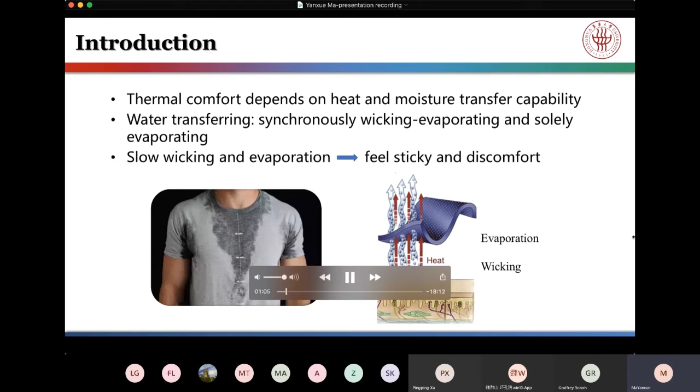One is synchronous wicking evaporating, and another one is evaporating alone. In case of excessive perspiration, clothes are saturated with air and moisture. The relatively slow action of wicking and evaporating could make people feel discomfort. So evaluation of the water transport ability of textiles is very important in fabric design and some functional clothing.

So the main purpose of this study is to provide an in-depth understanding of water transferring in woven fabrics. As we know, fabric porosity can influence moisture transfer, and it was found that the float and interlacing point, which are the 2 elements in a weave, can increase the whole water transfer to a certain level.

However, studies on water transfer behavior of woven structures, considering the percentage influence of different weaving elements, are very rare. So in this study, we designed 4 types of basic units in a 1-layer woven fabric, depending on the 2 directions of yarns, interlacing or non-interlacing. We aimed to review the water transfer process of woven fabric and to identify its main influencing structural parameters.

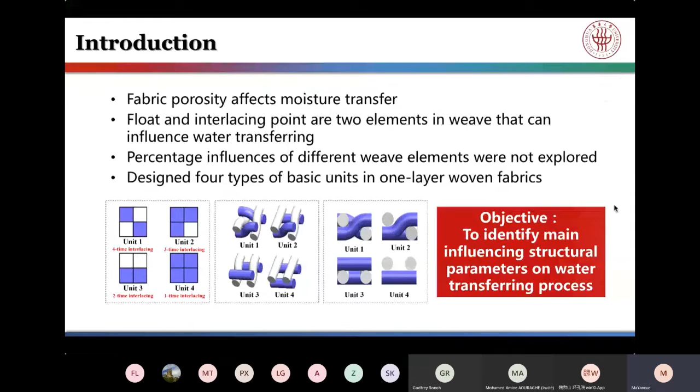Next, I'd like to show the experiment design in the study. All weave types are composed of interlacing points and non-interlacing points, as shown here. In the study, we adjusted the proportions of the 4 units in a weave and created different structures with varied floats.

Since the weave pattern influences wicking and evaporating behavior of fabrics, we varied the 4 weave units and their arrangement. Fabrics were designed and produced with different proportions of weave units. You can see these 8 fabrics have different weave units and different arrangements of these units.

Here are the results of the basic physical and structural properties of these samples. In addition to physical and structural properties, we focused on wicking evaporating behavior, so we needed a better way to evaluate it and collect the data for these measurements.

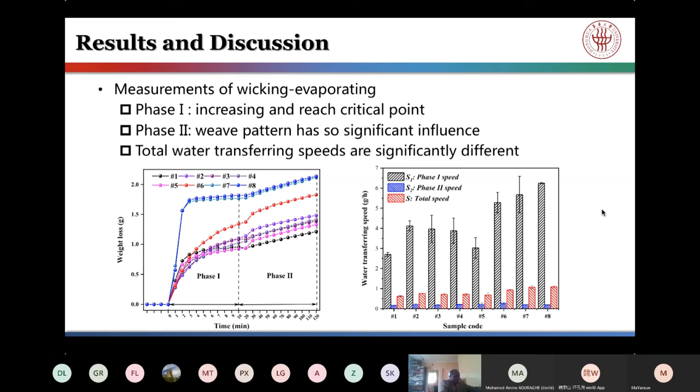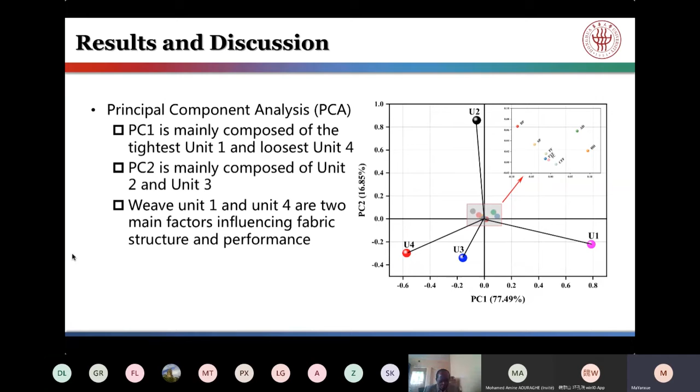To make a conclusion: in the study, a wicking evaporating test based on vertical wicking was used to investigate the water transfer behavior of cotton woven fabrics with different weaves. There are two phases during the wicking evaporating processes. In phase 1, it's unsteady wicking and evaporating, and in phase 2, it's steady wicking evaporating due to equilibrium between the capillary and gravity forces.

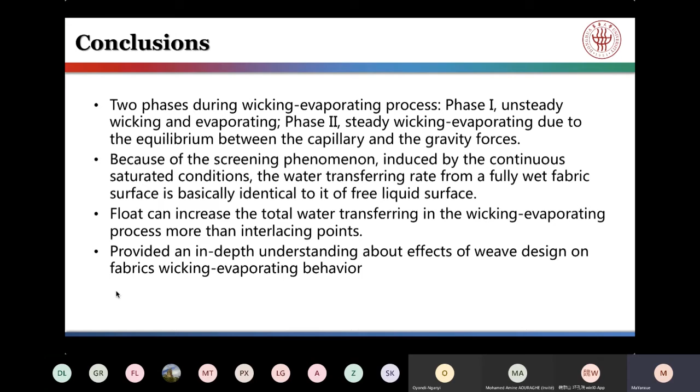I've finished my presentation. Does anyone have a question for me? Thanks very much for your presentation. Then I think I can ask the listeners if they have any questions for your presentation. Any questions?

Maybe if there are no questions, then maybe it means that your presentation was very clear. But maybe if there are questions we can raise at some point later on in time. Thank you very much.

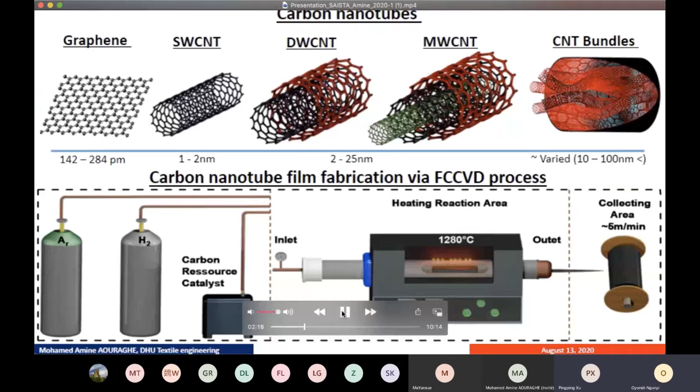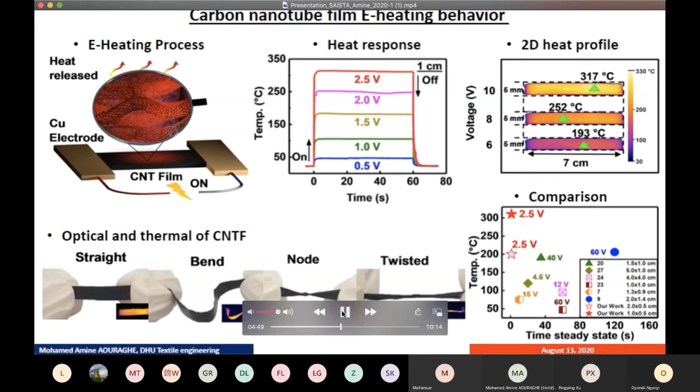As an application of the thermal conversion of CNT film, we have made a composite based on CNT film and PDMS to make an electrothermal actuator.

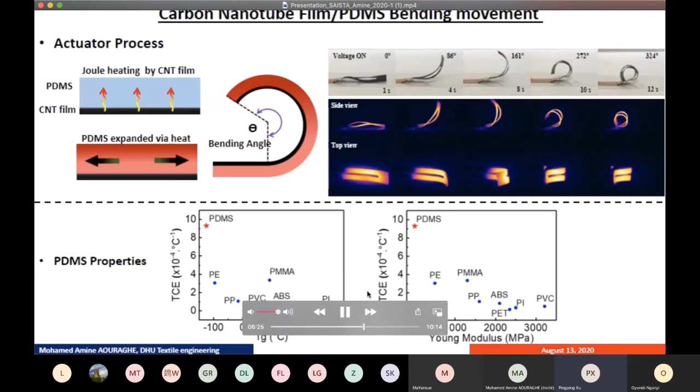Due to the high thermal conversion of CNT film, the heat is transferred directly to the PDMS, which expands under heat and leads to mechanical deformation and bending of the composites, as shown from the optical and thermal images. The mechanical movement is mainly due to the coefficient of thermal expansion mismatch between carbon nanotube film and PDMS. Among common polymers, the used PDMS has a great coefficient of thermal expansion and is a soft material, which leads to large deformation.

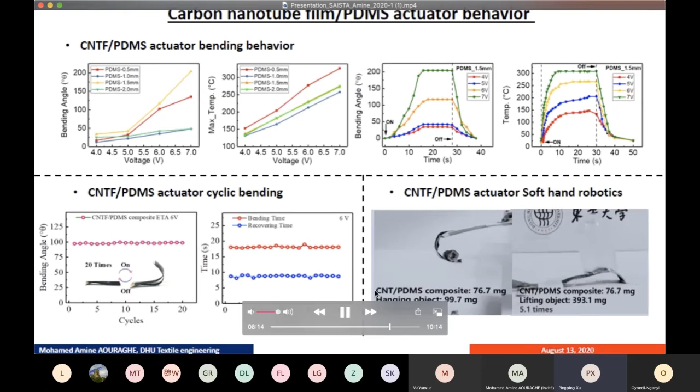In addition, the fabricated PDMS actuators showed a stable response over time, with stable bending angles of around 100 degrees at 6 volts, even after 20 cycles of on-off. The bending time and recovery time also remained stable after 20 cycles.

Finally, the actuator shows great strength and can hold around 1.3 times its weight, and lift around 5 times its weight, as shown from these optical images.

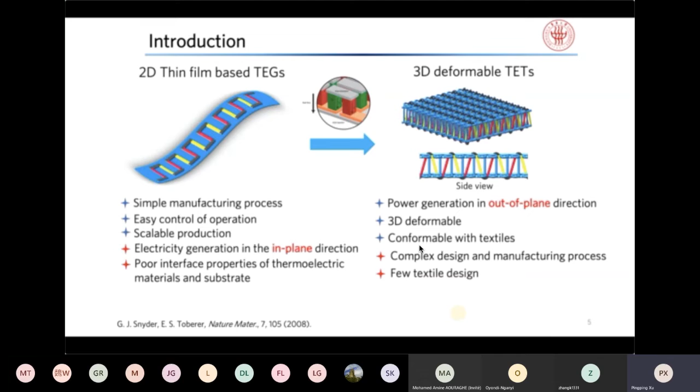So the first step: we fabricate the segmented thermoelectric yarn using highly conductive carbon nanotube yarn. We wrap them into a PET plastic plate and then coat them with silver paste as the interface with the p-type and n-type materials, using the center part as the electrodes.

You have alternating p-type, n-type, p-type, n-type segments. So then we can use the thermoelectric segmented yarn to fabricate the thermoelectric generator.

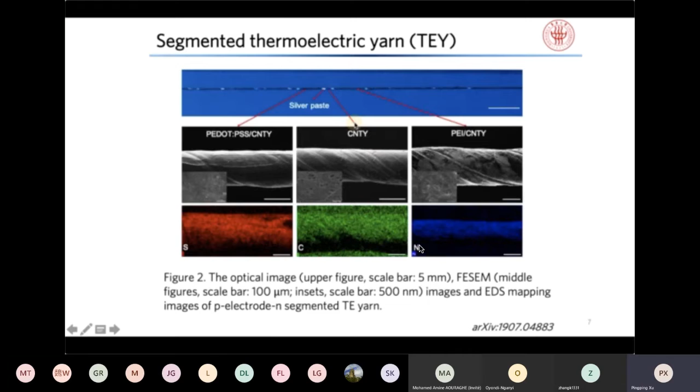The middle part is the pure carbon nanotube yarn, acting as electrodes connecting the p-type and n-type materials. We also measure the thermoelectric properties of the three different segments: the conducting polymer, the pure carbon nanotube yarn, and the p-type and n-type ones.

We then investigate the effect of textile structure on power generation, selecting three types of fabrics: knitted fabric, spacer fabric, and woven fabric. We use finite element analysis to simulate the power generation.

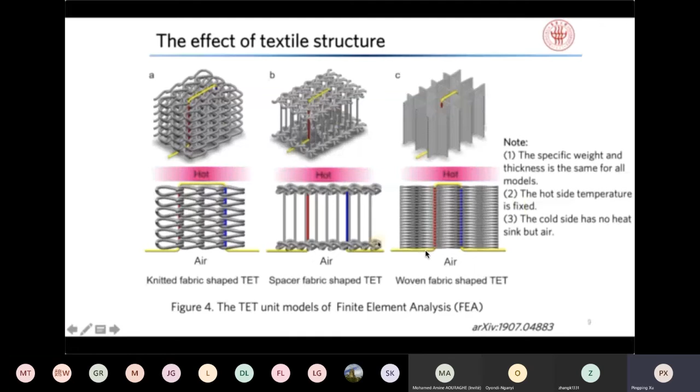We believe this is caused by thermal transport in the fabrics, and the total temperature difference in the thickness direction is dominated by the total thermal resistance. Different fabric configurations result in different thermal resistance of the textile, changing the temperature distribution and the corresponding potential distribution within the thermoelectric yarn.

Typically, woven fabric has a very regular yarn arrangement in the thickness direction, so we believe there are few closed channels that can lock static air to suppress thermal convection in the woven fabric.

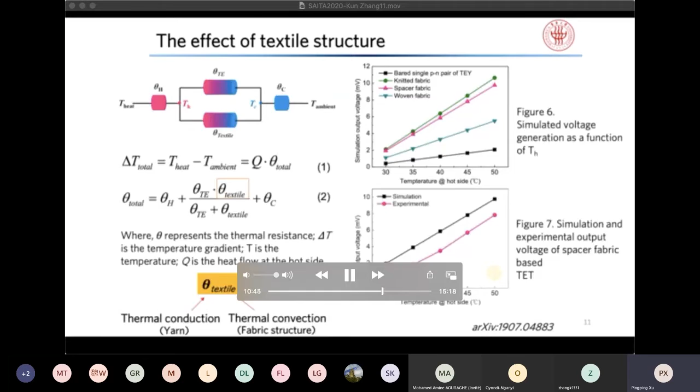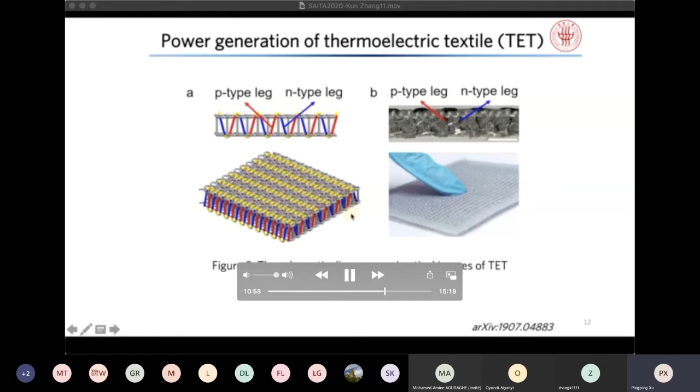As mentioned before, the actual structure of the thermoelectric generator, the textile-based ones, shares a similar configuration to conventional bulk inorganic thermoelectric generators. The thermoelectric textile shows very flexible properties under bending, twisting, and compression, and the performance is stable even after 1,000 cycles of bending, twisting, and compressing.

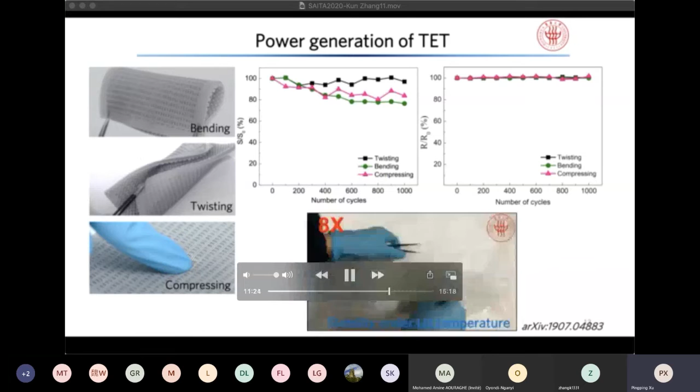Moreover, it shows excellent flexibility and functional stability at liquid nitrogen temperature, where lithium-ion batteries would be disabled due to frozen ion transport. We then measured the power generation at different temperature differences and external resistances.

Our thermoelectric textile outperforms the majority of textile-based thermoelectric generators, and it is the best one ever reported among organically based thermoelectric textiles.

We further demonstrate the capability of powering electronics for practical applications by firstly charging a supercapacitor. Then we use the supercapacitor to power electronics, and the diagram shows how we charge and discharge the supercapacitor.

The red part shows the charging time and the green shows the discharging time. We can see the charging time is much shorter than the discharging time in the consumer product, which means we can use the thermoelectric textile to continuously power electronics.

This summarizes the power requirement for different electronics, and we can see this is much lower than the power generated from the thermoelectric textile.

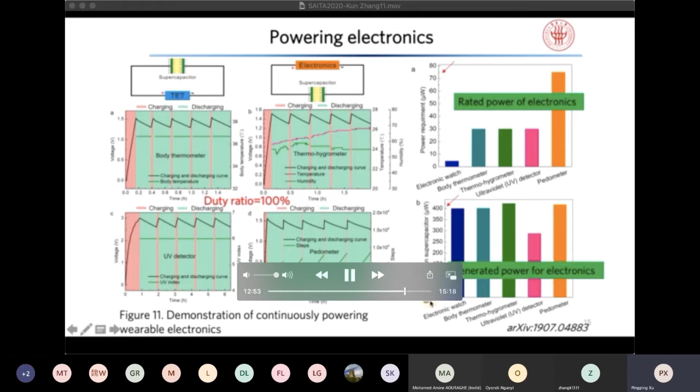This video shows how we apply a temperature difference using liquid nitrogen, and then how we generate power to power something. We can also use the thermoelectric textile to directly power electronics like a thermometer, hygrometer, UV detector, and pedometer.

Finally, we demonstrate how to scalably fabricate the thermoelectric textile using an industrial textile process. For example, we quickly braid the thermoelectric yarn with a sheath of polyester to improve anti-friction properties, and then we use a computerized flat knitting machine to produce the thermoelectric textile.

The textile thermoelectric is very flexible. It should be mentioned that we can precisely control the N-type and P-type yarn movements in the knitting machine.

The N-type yarn arrangement may not always range perfectly in the textile, but in the lab project, we achieved that uniformly.

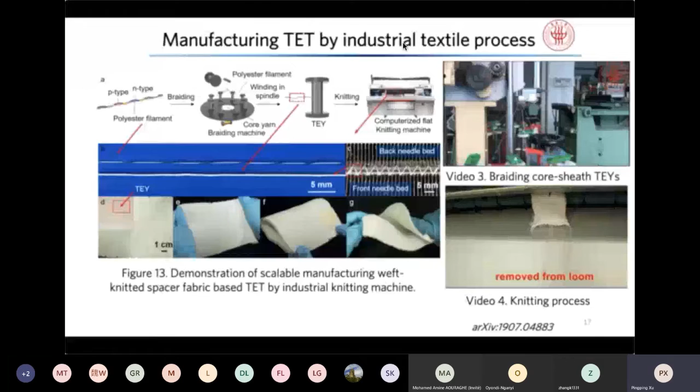Finally, I would like to conclude my presentation. We demonstrate thermoelectric textile and investigate the effect of textile structure on power generation. We achieve high power generation performance with a power density around 50 milliwatts per square meter at a temperature difference around 47 kelvins, and for the first time we successfully and continuously power various electronics using thermoelectric textile.

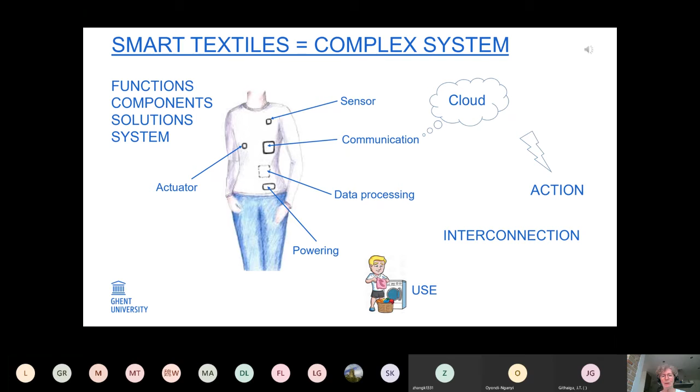Now our research mainly contains 4 steps. First, conceptual design. So we look at the different concepts that have been described in literature, in textiles, but also in other areas. Based on that, we pick solutions, concepts, which are compatible in terms of the materials used and also the processes needed for manufacturing them.

We also look at modeling and simulation because this allows us to optimize the design and the materials choice before making anything. Then, of course, we have the fabrication, which should be as much as possible in line with existing textile processes in order to avoid large investments in new facilities. And then, of course, also the testing.

Now, some products are already on the market. Here are just some examples. Mainstream markets, such as the Adidas miCoach shirt, which is used for heart rate monitoring for sports people.

Then the mid-segment is fashion. This is an example of CuteCircuit. It's a t-shirt equipped with LEDs and movement sensors, accelerometers, which monitor when a person is moving, and then the movements are reflected in the lighting of the LEDs.

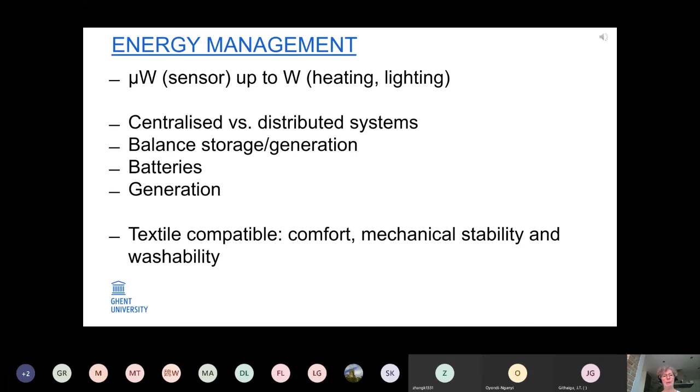The first work we did on energy storage has been in collaboration with Moi University. It's Dr. Sheila Odhiambo who did this work, and it was continued by Dr. Ida Nuramdhani from Indonesia. It actually consists of two conducting wires which act as the electrodes, a positive and a negative one.

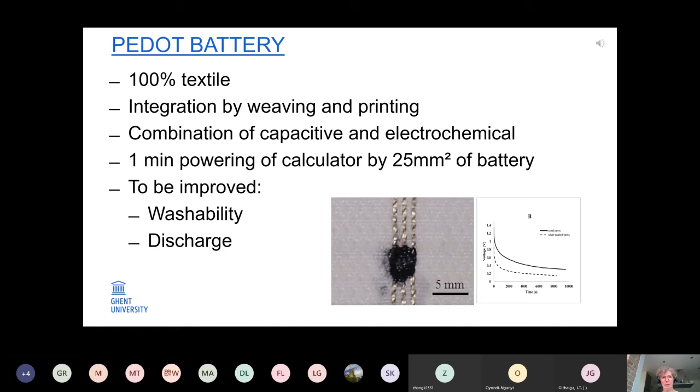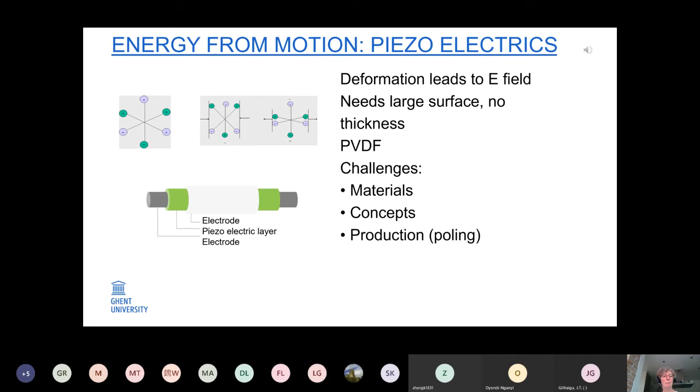Now, when you deform a material, the piezoelectric effect is a surface effect. So the energy you need for deforming the inside, the bulk of the material, is actually wasted. Part of it will be recycled, but as you know, deformation for most materials is not fully elastic. It has some hysteresis, and this is a loss of energy. So for a thick material, this energy loss will be higher, whereas the piezoelectric effect is purely surface - the bulk material doesn't add to any additional power.

That's why we need a minimum thickness, but the minimum should not be too low, because then we may have percolation of current between the two electrodes, and then you get holes and the system is broken, it doesn't work anymore. Particularly during the poling, where we need a high electrical field, this is an issue.

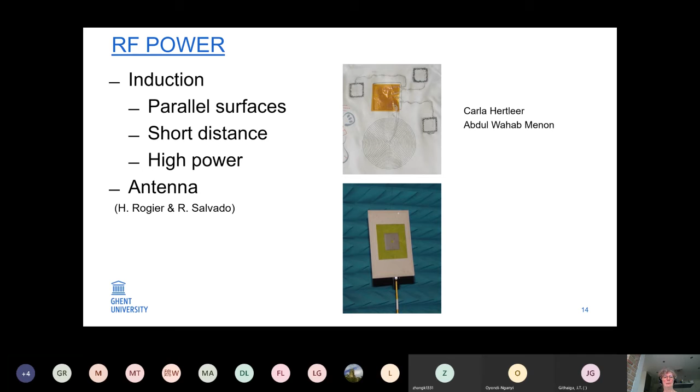Once the baby starts moving, this is not working anymore, because the surfaces will not be parallel, as the baby will turn around, and then we have to use another way - a regular antenna. This is the green patch you can see here, but actually the green patch is the substrate. The antenna is the gray part, which is laminated in this picture.

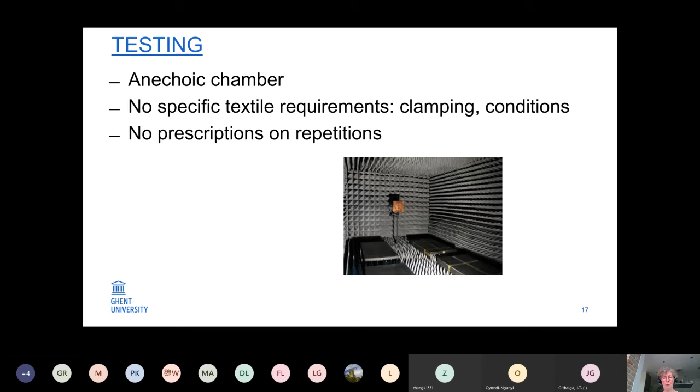It has been explained already in the previous paper, so I won't repeat this. The start of the work has been the thermocouple with copper and nickel materials. The PhD student working on it is Hardianto, and he will defend his PhD next week. So should anybody be interested in joining the presentation, please send me a message and I can forward you the link. It will be online.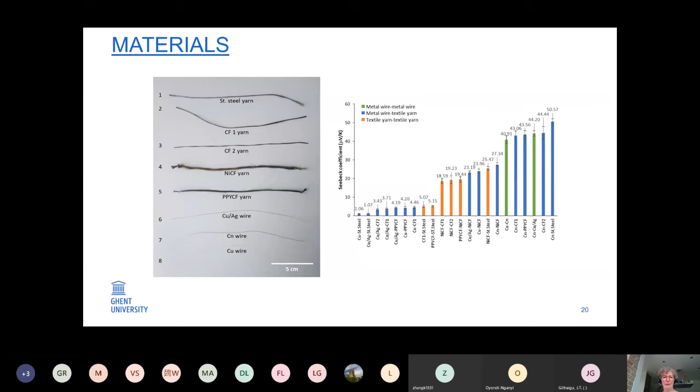For the textile structure, we have used carbon multifilament as a conductive core and nickel as the second material. The Seebeck coefficients of the materials are 3, and should be -15. So we can expect a theoretical output voltage of around 18. The carbon fiber has a moderate conductivity, which is needed to make sure the current is passing through the nickel coating in the dedicated area. This allows creating such a thermoelectric effect using a textile yarn inserted by a regular weaving process.

The coating can be achieved either by local etching of a nickel coating on a nickel carbon fiber material, which can be bought commercially via the internet, or by local electroplating of the nickel onto the carbon fiber multifilament.

How did the models help us here? Well first, on a material level, it gives us an idea on the maximum achievable output, the material impact, considering both the conductivity of the materials and their Seebeck coefficients, and the dimensions of the whole system. For the modeling, we needed to do some simplification, but we also managed to show that simplifying the multi-filament into a monofilament with the same cross-sectional area of the carbon fiber and the nickel coating is allowed. It doesn't have an impact as long as a good contact can be guaranteed.

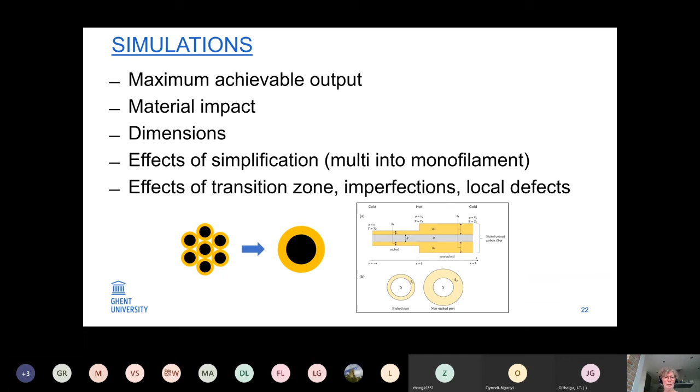You can see that from a concentration of 10% peroxide, the nickel layer is fully removed, or at least it is removed to an extent whereby you have an optimal functioning of the system.

Then integration in a textile. Here the yarn has been inserted by hand because the etching has been done at the level of the fabric, and we achieved a thermal voltage of 16.7 microvolts compared to a theoretical maximum of 18, which is an efficiency of more than 90%, which is quite good.

The total voltage can be increased by having multiple pairs in series, which is a linear effect. The nickel coating has to be optimized because if the coating is not properly done, the outcome will be lower, and in some cases it can be as low as 3 microvolts. So it's really important to work on this to get a good result.

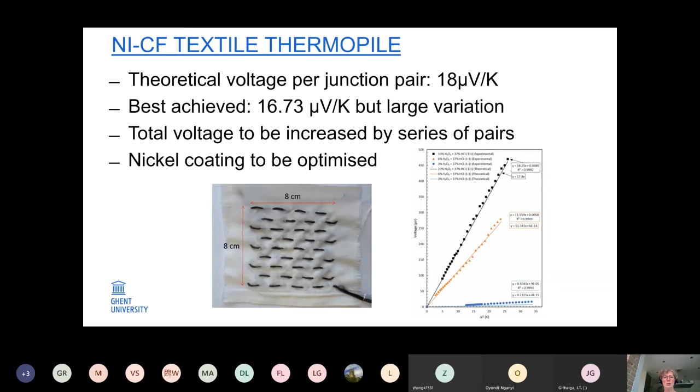Then the testing. The testing includes the functional properties and the textile use. Here also we had to develop methods for measuring the voltage and for creating the hot and cold side of the fabric. So we used a hot plate and allowed it to cool in air, so the ambient air was the cold side.

And then to conclude: the first general conclusion is that energy scavenging as well as storage can be done by textile structures using textile materials and textile processes, and various principles are feasible. We heard in other papers that other concepts are feasible as well. We need an energy management strategy because energy is scarce, and it's not easy to supply sufficient energy for powering a complete system. Modeling is very useful to support the design phase.

Test methods lack or need adaptation, and in November there will be an online conference on testing smart textiles and standards. Energy solutions largely depend on the application. Just remember the baby suit, whereby for newborns the inductive solution could be proper, but for elder babies this is not feasible anymore. And reliability is an issue.

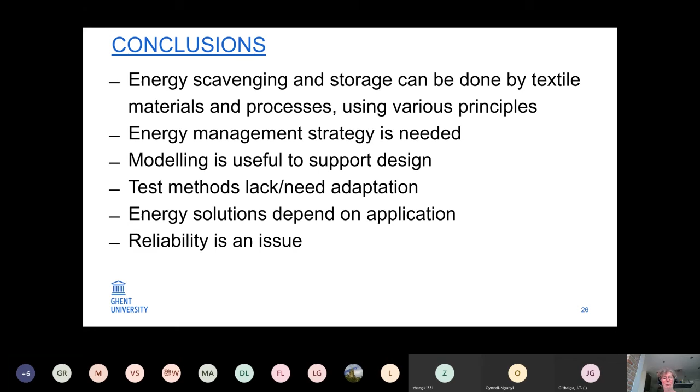So with this, I conclude my presentation. And if there are any questions, you can always ask them or contact me later, send me an email or a message, and I will try to help you. Thank you.

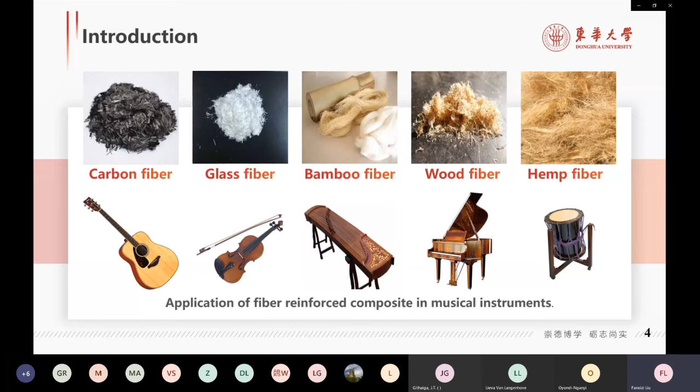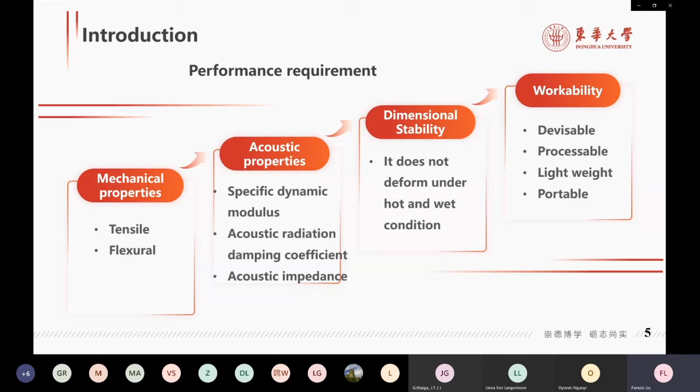Drums need to meet some requirements, such as mechanical, acoustic, dimensional stability, and processability. Especially the acoustic performance, we use 3 indicators to evaluate it, which I will talk about later. In our studies, 4 types of epoxy resin composites reinforced with the fabric of hemp, flax, ramie, and jute, respectively, are fabricated using Vacuum-Assisted Resin Infusion Molding, VARIM.

The tensile properties of the composites were tested using a universal testing machine according to the ASTM D3039 standard. The flexural properties test was performed on the same machine according to ASTM D7264.

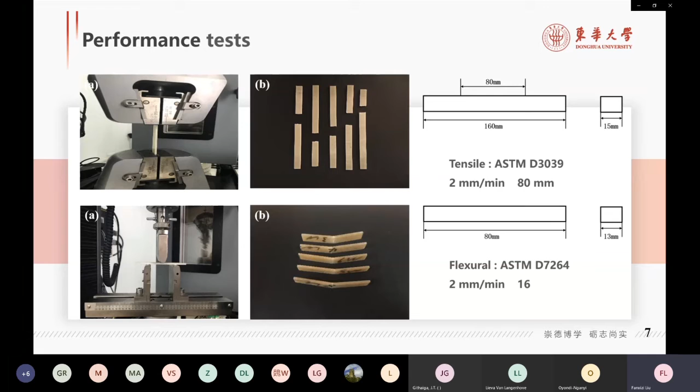It can be seen that the strengths and moduli of the 4 composite materials were larger in the weft direction than those in the warp direction, because the weft yarns were thicker and the weft fabric counts were larger than those of the warp.

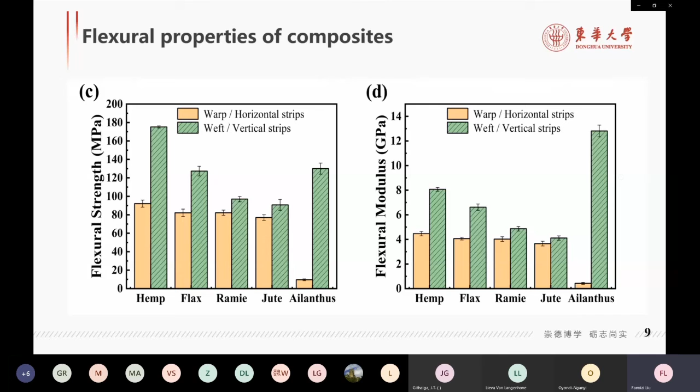The crimps of warp and weft yarns in the composite materials could reduce the utilization of the strengths and moduli of the yarn in the composite materials.

It's obvious that the warp crimps of the 4 fabric composites were significantly larger than those of the weft. Among them, hemp and flax weft yarns had little crimp, ensuring a high rate of fiber strength utilization, and the crimp angles of ramie and jute weft yarns were about half of those in the warp yarns. This could effectively increase the tensile strength and moduli of the composites in the weft direction.

The acoustic properties of the 4 composites were between those of horizontal strip and vertical strip of the ailanthus. Since the flexural modulus of the composites was lower, and their density was higher than those of ailanthus, their specific dynamic modulus and acoustic radiation damping coefficients were lower, and the acoustic impedance were higher than those of the wood.

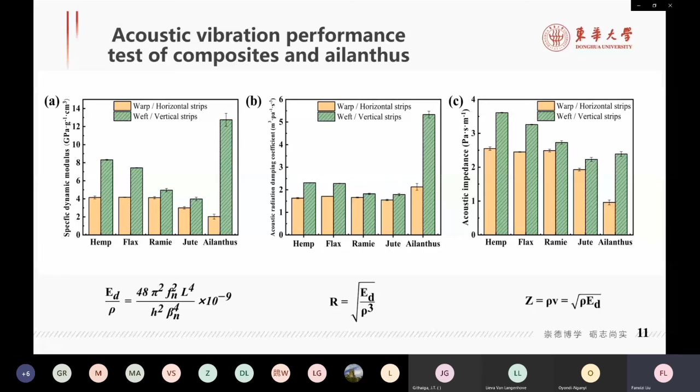The resonance frequency of the composites and the ailanthus all range from 0 to 5 kHz, and for all the natural frequencies of the composites were between those of the horizontal strip and the vertical strip.

Hello. Hello. We appear to have lost you, Francis Liu. Are you there? Okay, I'm here. Okay, continue. Yeah, it's okay. Continue.

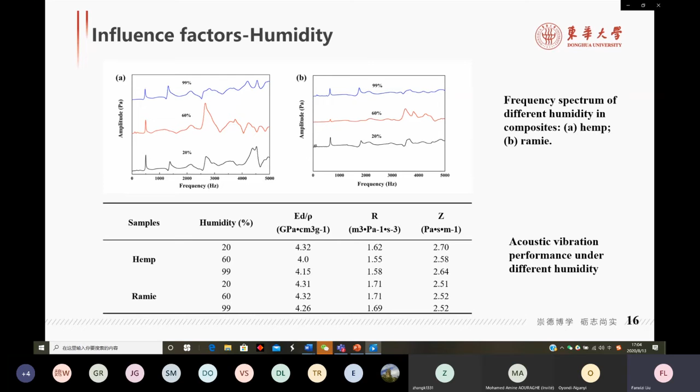At present, we have produced a first degradable green composite sample, and we will continue to improve it later and cooperate with the company for mass production. Through research, we found that natural cellulose fibers may be a sustainable substitute for wood and an ideal sustainable material for musical instruments. But for its acoustic performance to be exactly the same as wood, there is still a lot of work to be further studied.

Thank you for listening to my report, and welcome to continue with me. Thanks.

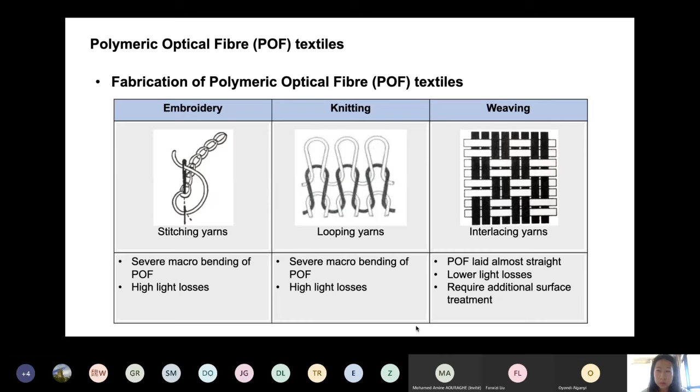Some POF textiles and prototypes have been designed and developed, including some prototypes by Dr. Jeannie Tan and Ziqian Bai.

However, the prototypes are quite bulky and need more variation in terms of appearance and tactility. Furthermore, the preparation process is still very time consuming, which prevents it from adapting for mass production.

Based on the review of existing works in the field of POF textiles, we can see that new functions are enabled for POF textiles with the integration of electronic technology.

However, the integrated electronic components add to the bulkiness of the design, which affects the usability and appearance. And the electronic connection process is still laborious and time-consuming.

Weaving plays a very important role in the development, however, has been neglected from the existing research. So the current POF textiles' properties are still rather limited, and most of them are still in planar and single layer form.

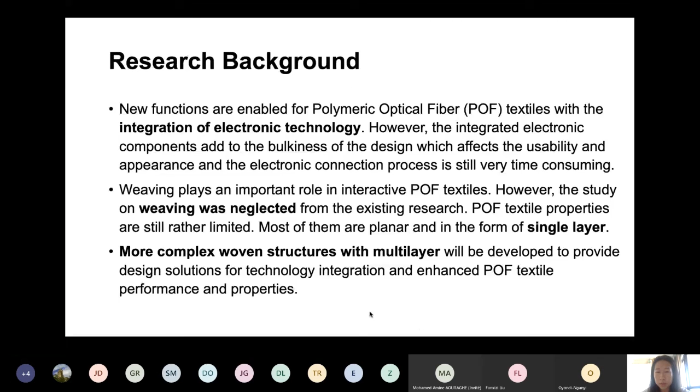For POF textiles, there are new design elements such as conductive yarns, power supply, microcontrol system, LED, and optical fibers that are integrated, which is very different from the traditional jacquard weaving fabrication process.

So there are new design challenges that we incur for the development of POF textiles.

From the weaver's perspective, there are three main aspects for the new challenges, including optimizing new performance, integrating with electronics, and seamlessly placing the functional yarns to meet both aesthetic and technical requirements.

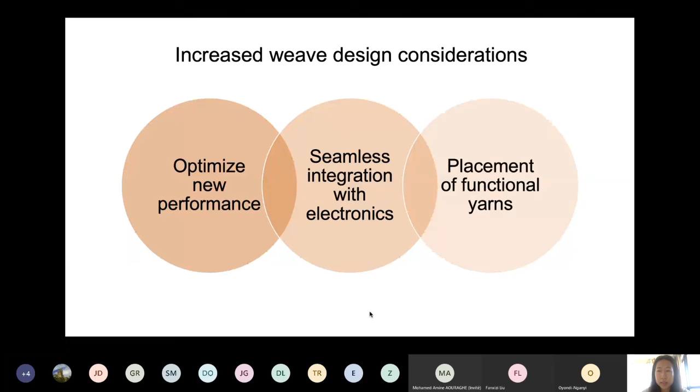Here I'm going to present four major challenges for my research, which cover the seamless electronic integration and new properties for POF textiles, and the weave design for a multi-sensory environment.

The first design challenge to overcome is to develop a new weave design method to achieve more seamless electronic integration. In order to connect with the electronics, POF fringes need to be created and separated from the rest of the yarn system.

The previous method of creating the POF fringes requires manual labor, and it is very laborious and time-consuming.

So I created this new three-dimensional compound weave using the floating technique, which enables the automatic separation of the POF floats and the other textile-based yarns directly via the jacquard weaving fabrication process.

This new weave technique has eased the electronic connection, and it enables development of POF textiles in one process, which has significantly reduced the time and labor.

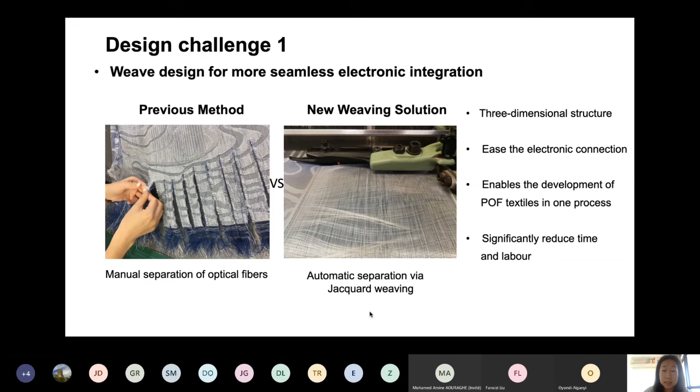However, this new weave solution has caused more issues during the weave production process, because it causes a great difference in the warp tension between the center motif and the POF fringe areas.

This has slowed down the weaving production process with a lot more dropped wires.

So in order to solve this production issue, a more balanced weave combination has been designed for smooth weaving production, which is illustrated on the left of the slide.

In addition, a lock section woven with plain weave is designed in between the center motif and the POF fringes to avoid the POF fiber slippage.

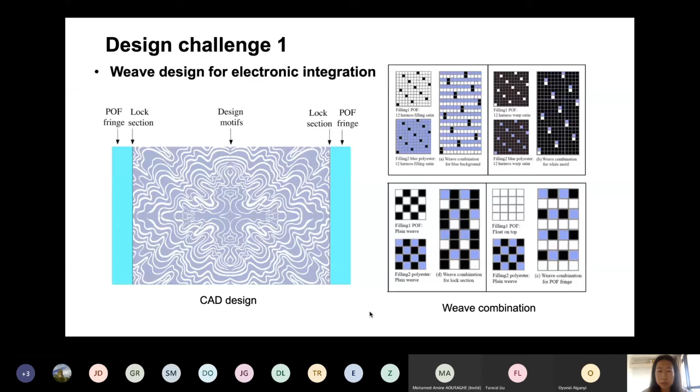The next experiment successfully fabricated POF textiles with a new property of three-dimensional effect and stretchability. The three-dimensional effect has increased the diversity in aesthetic and tactility, offering more versatile visual and tactile experience for users during interaction.

The new property of stretchability has contributed to increased comfort and flexibility for POF textiles. These new properties are enabled by using double weave combined with spandex and suitable motifs. The motif was designed in a wavy pattern to allow space for spandex to shrink, and stitched double weave is alternated with unstitched double weave. As seen in the bottom right corner, the white section is designed with unstitched double weave, and the black section with stitched double weave.

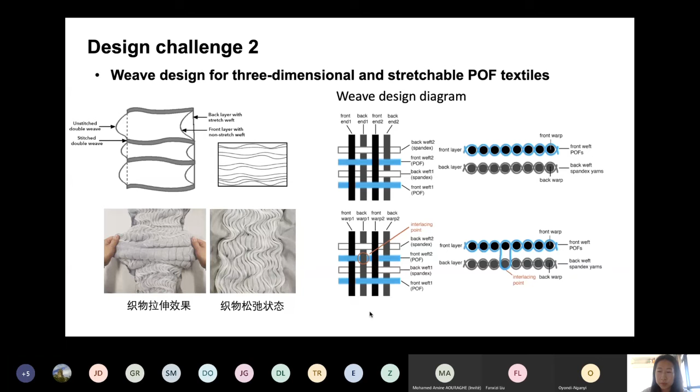The spandex at the unstitched double weave section can shrink at the bottom, with the POF puckering out on top, creating this three-dimensional effect. The weave design is also shown in the diagram on the right with a cross-sectional view, and this shows how the new POF design is applied onto fashion pieces.

The next design challenge is to enhance the touch-sensitive function of POF textiles. Two interactive cushions were developed, named Sensi and Capi. Several major weave design aspects are tackled, including the design for capacitive sensing areas, surface textures and interactive sections, electronic connection, and more balanced weave combination for smooth production. The touch sensing ability is enabled by directly weaving conductive yarns at the designated areas, which replace the foil paper used in previous prototypes.

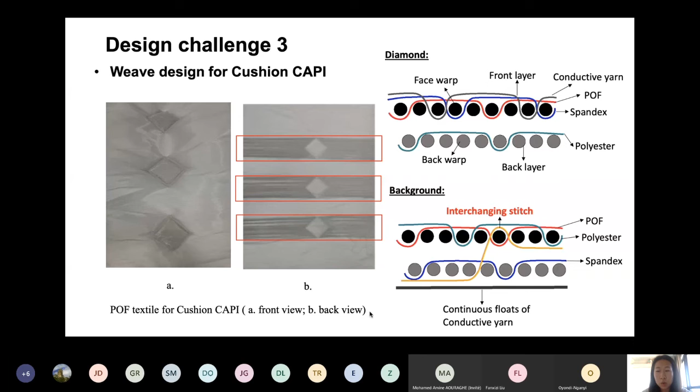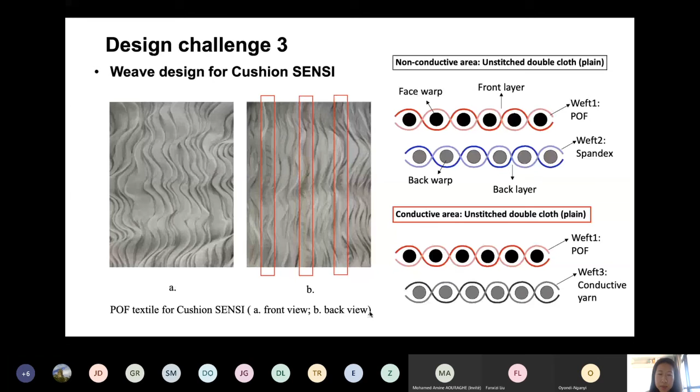For cushion Capi, three interactive sections in diamond shapes are designed as touch-sensitive buttons, and illumination of the cushion is activated by touching the diamond areas. Similar design principles and weave approaches have been applied to cushion Sensi, achieving a different appearance and texture. This shows how the interactive function works with the designated areas, along with the illuminated views of these two interactive cushions.

The final design challenge in my study is to develop POF textiles for a multi-sensory environment. This project is collaborated with a Dementia Care Center in Hong Kong. A diversity of tactility and appearance was created for this interactive panel to provide sensory stimulation to benefit the elderly through visuals and touch. Double weave and novelty yarns are combined to create distinct textures for the POF textile pieces, and the motif designs were co-created with the social workers and elderly in the care center, reflecting nature and local cultures.

The versatility of the POF textiles became an effective stimulation to trigger positive emotions for the elderly.

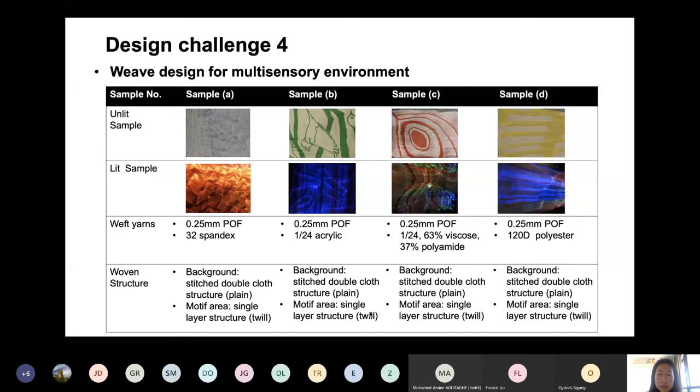To sum up my work: interactive polymeric optical fiber textiles serve as flexible illuminative materials, providing a dynamic visual appearance with their unique illuminated quality. With the advantages of lightweight and flexibility, optical fiber is a very suitable material that can be fabricated through traditional jacquard weaving to achieve interactive and illuminated functions.

New weave design approaches can bring enhanced properties and performance for POF textiles, as well as more seamless electronic integration methods. That's the end of my presentation, thank you very much for your attention. If you have any questions, I'd love to answer them.

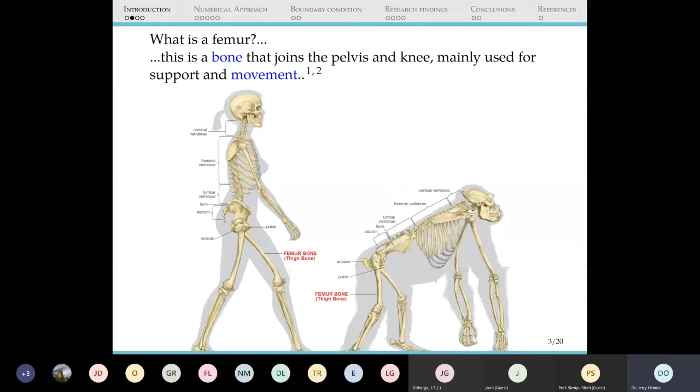The fact that this bone is used for day-to-day movements makes it prone to a lot of fractures. Most of the time the femur bone is under tension, and when it's under tension it will often crack due to overloading. Sometimes it also cracks not only due to tension but also compressive forces. When the bone undergoes compression due to weights or loading, it will tend to shear at its shaft.

At times, due to accidents, the bone can also undergo twists, or what you call torsion, and therefore it can crack in the direction of the twist. So the biomechanics of femur fractures is mostly affected by tensile forces, compressive forces, and torsion. All these forces or loadings occur when the bone is in use, mainly under support or movement. This necessitated the need to repair the bone.

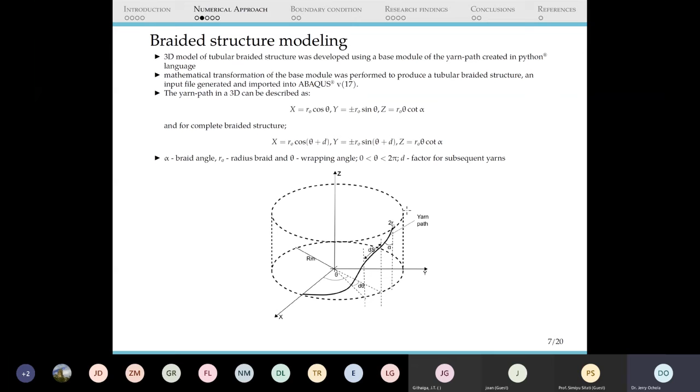And we only focused, or we only used the femur shaft and the proximal head, because the fracture that we wanted to simulate was on the femur shaft. So we actually removed the distal femur and only did analysis on the shaft and the proximal femur.

So after we generated the CT scan, we removed the spongy components of the femur and only simulated again the cortical bone. So in this particular study, we are only looking at the hollow bone.

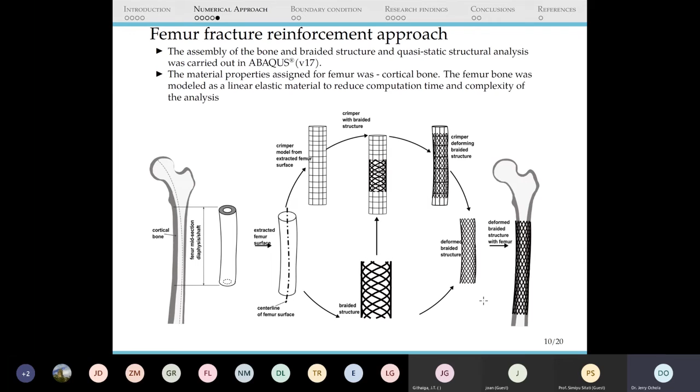The boundary conditions that we applied during our analysis: first we were trying to do quasi-static structural loading of the bone. Quasi-static structural loading is the case whereby you actually balance the internal forces and the kinetic forces, to ensure that the simulations are not affected by external forces, and that the loading is actually smooth, so to speak.

In load 2, we applied the forces at 120 degrees, what you'll consider here as a single stance configuration. The amount of force that we applied here was 800 newtons, which is approximately the weight of an adult human.

Now, something also that we did in our boundary condition applications is that we balance the joint reaction forces that come from the hip with the abductor forces on the bone.

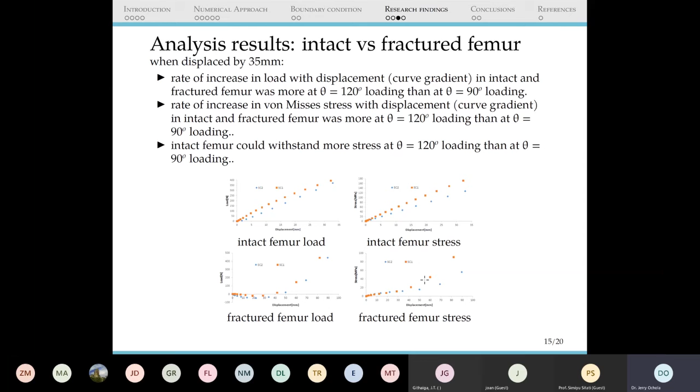In this regard, we believe that reinforcement of the bone using the braided structure could offer some support to fractures in the bone, or some stability, so to speak. We learned that the strength of the bone increased, and also its stiffness. This suggests that a study in this direction can offer some solution to bone repair, or the bone surgery that is being done today.

Finite element analysis, or numerical analysis, the approach that we used here, is also a feasible way of doing these particular studies. They can give insight to bone repair studies in vitro. Those are some of the citations that we had. Thank you very much, Chair.

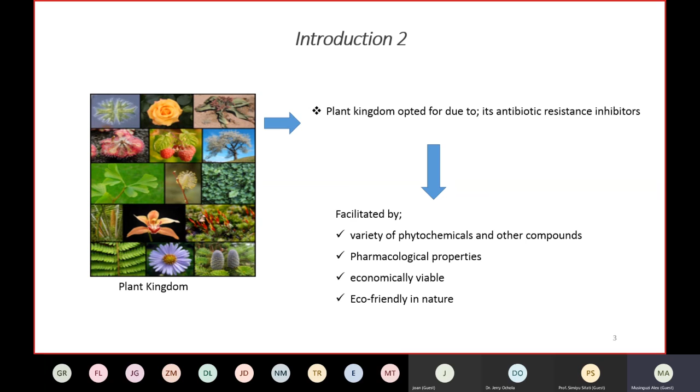My main objective was to evaluate the effect of the Datura Stramonium, Ricinus communis, and Galinsoga parviflora plant leaf extracts on Staphylococcus and Pseudomonas bacterial strains. My specific objectives were to prepare plant extracts using aqueous and ethanolic extraction methods, and to evaluate antibacterial efficacy using disk diffusion and serial dilution methods.

This study will indeed help to discover bioactive drugs which are eco-friendly, non-toxic, and non-allergic as a replacement for synthetic drugs. It will also address healthcare-associated infections, as well as add to the number of possible medicinal plants discovered so far.

In my methodology, we collected plants from the western part of Uganda, whereby their leaves were dried under the shade and ground into coarse powder, as can be seen in step A.

Then in step B, we mixed the coarse powder of these leaves with water and ethanol and left them to settle for 15 minutes. Thereafter, they were introduced into a water bath set at 50 degrees Celsius and left for 24 hours for extraction to take place.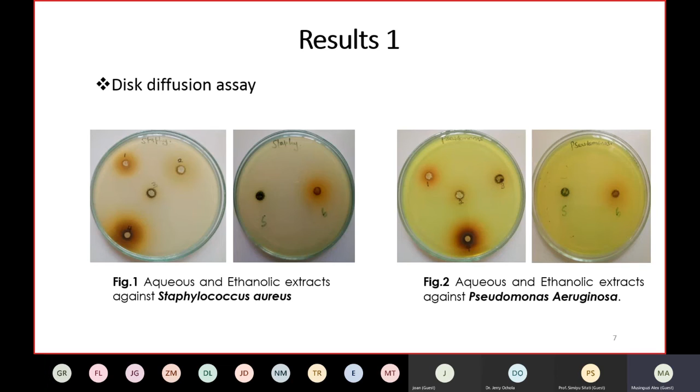Antibacterial activity of the control confirmed that distilled water and ethanol didn't have any influence on the inhibition zones obtained, as compared to standard antibiotics like amikacin and ciprofloxacin, which had activity against the bacterial strains.

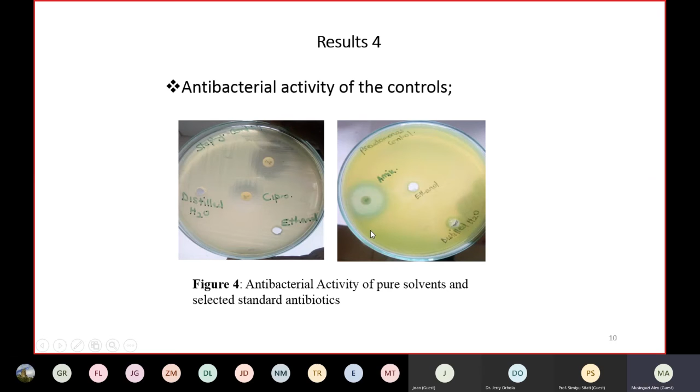In our discussions, it was confirmed that the presence of varying phytochemicals contained within the extract led to the variations in bacterial growth inhibition. Also, it was confirmed that bigger zone of inhibition for aqueous extracts compared to ethanolic extracts was indeed as a result of the variations in the ability of the solvent to dissolve the grounded plant leaves.

Then the differences in morphological nature of microorganisms was further found to influence the activity recorded against gram-positive and gram-negative bacterial strains. Then the presence of varying phytochemicals like cyanogenic glycosides, among others, might have contributed to the lowest minimum inhibition activity for aqueous

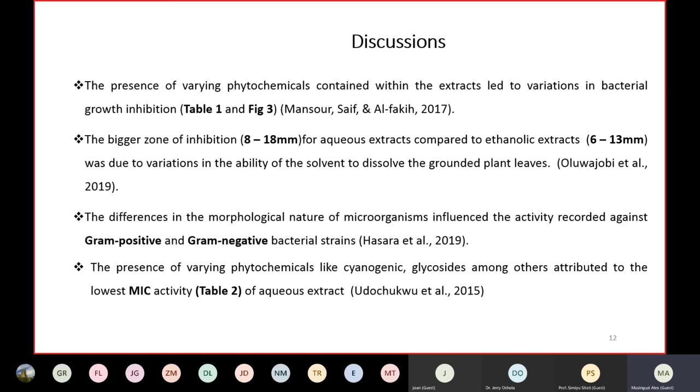as compared to those obtained with ethanolic extracts. Then the research will help in preventing the growth and transmission of microorganisms in the healthcare environment, as well as steering the increase in production of these medicinal plants for dye production. Also, this research will create jobs for the locals, thus improving their standards of living.

This research was concluded by confirming that aqueous extracts of selected medicinal plant leaves demonstrated bacteriostatic activity against the selected bacterial strains, thus justifying the persistent use of these herbs in traditional medicine. Thank you for listening.

Thank you very much, Alex, for the presentation. Very good presentation. Now I know that when I get the herbs, they can kill bacteria. Yes.

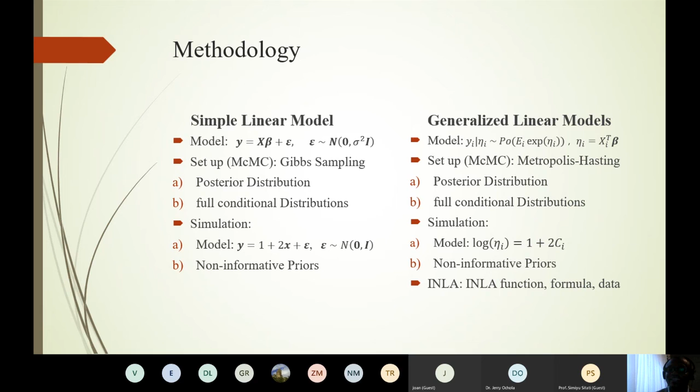Now, the parameters we estimated as follows. We see that the true value for the intercept was 1, the slope was 2, and the variance was 1.0. INLA estimated the intercept as 1.281, whilst MCMC estimated the intercept as 1.283, and both of them had a standard deviation of 0.11.

If we consider the slope, which is beta 1, we see that MCMC estimated the slope as 2.097 with a standard deviation of 0.12, and INLA estimated the slope as 2.098 with a standard deviation of 0.12.

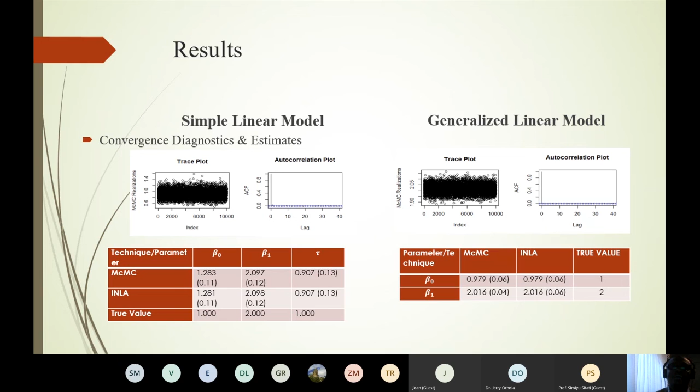Now, as I've already discussed the convergence because of the trace plots, let me just move on to the accuracy. We see that the estimates of tau, beta naught, and beta 1 were very equivalent when the estimates from both techniques were compared.

And then when we look at the time, we actually timed the processes, and MCMC for the simple linear model took 5.14 seconds to give us the realizations, and for the generalized linear model, it took 21.87 seconds to give us its realizations, but INLA in both instances took less than 3 seconds.